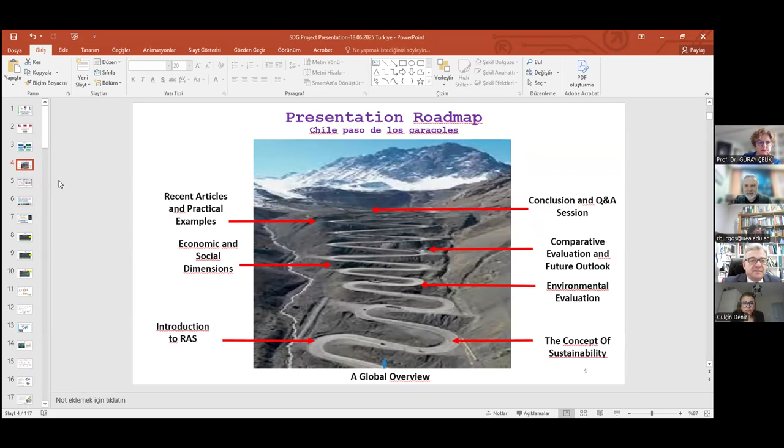This is about calories, and conflicts and income inequality I mentioned. We want to solve this problem with fisheries and aquaculture, and we would like to talk about fisheries and aquaculture.

Global fisheries and aquaculture production reached 223.2 million tons in 2022. Global per capita consumption of aquatic foods increased from 9.1 to 20.7, though these ratios change based on different countries and continents. For the first time, aquaculture surpassed capture fisheries.

We have to think about engineered facilities versus natural areas, and compare them. Because of these numbers, we have to think about more feasible engineered facilities compared to natural resources. In 2021, aquatic foods contributed at least 20% of animal protein for 3.2 billion people.

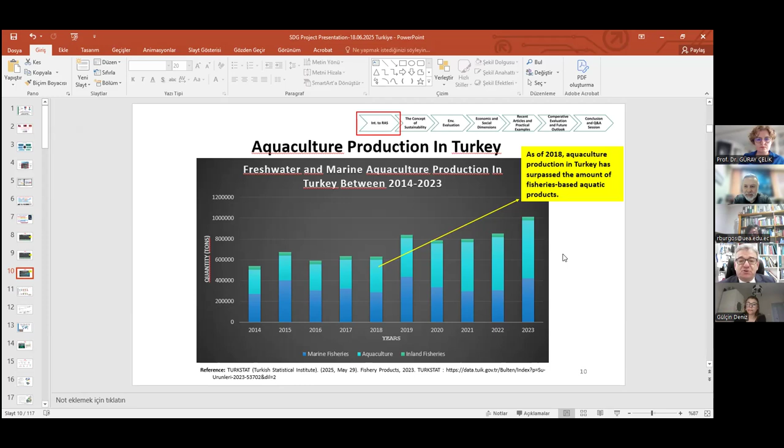Aquaculture production quantities by species in Turkey include sea bass, rainbow trout, gilt-head sea bream, in both marine and freshwater environments. In marine conditions we call it Turkish salmon, Oncorhynchus mykiss - sorry for the Latin pronunciation - we have a special species of rainbow trout.

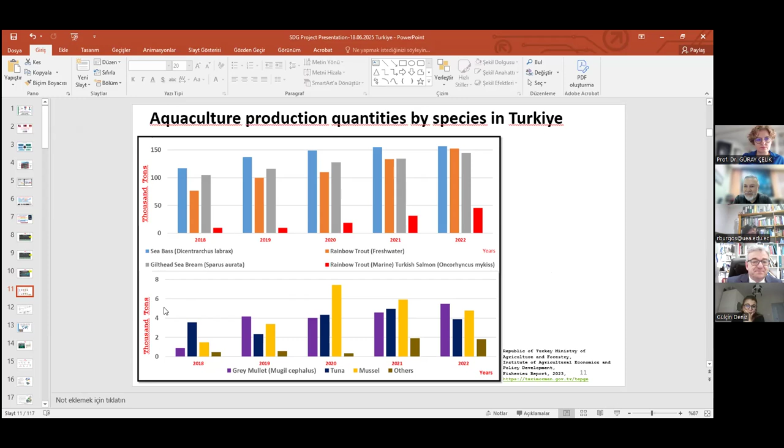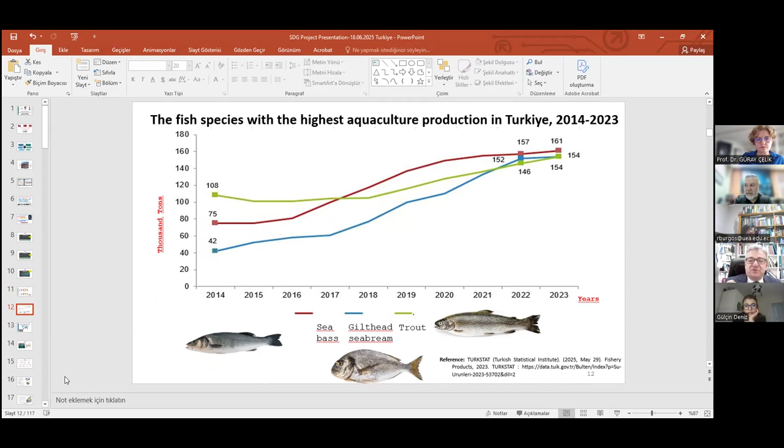The fish species with the highest aquaculture production in Turkey are sea bass, gilt-head sea bream, and trout. We generally prefer these based on kitchen behaviors or general food applications.

Introduction to recirculating aquaculture systems: like environmental engineering applications in aquaculture, recirculating systems are very important because, based on these systems, we have to think about more efficient production. On the other hand, we are talking about carbon footprint, energy consumption, and total production ratios.

The recirculating aquaculture system is a modern fish farming method in which fish are raised at high densities in closed, controlled environments, like pools or spatial areas under a roof, where we can manage specific parameters, even using artificial intelligence now. We have many different automation systems to grow fisheries and other production.

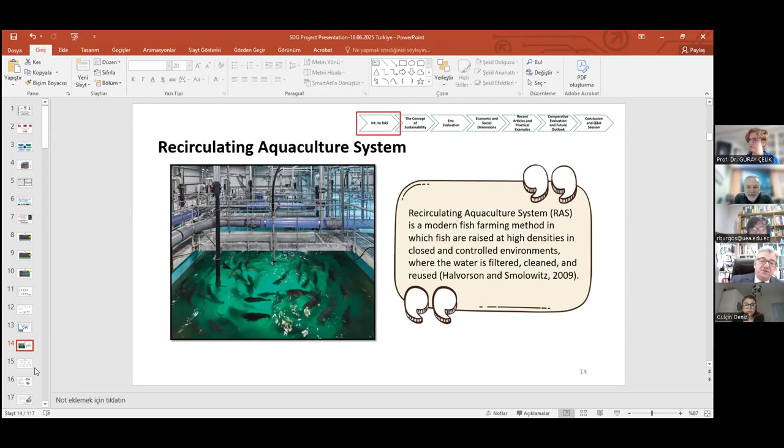Let's have a look at the history of aquaculture systems. Firstly, it's written in some literature that the Japanese - I know this - some different countries applied RAS systems, but the Japanese were more advanced than other countries.

Origins of modern RAS trace back to a German program in the mid-1970s, Denmark, and also the Netherlands in the 1980s. China pioneered the development of marine RAS systems. Now different nations, especially Norway, Chile, and other countries, even Turkey, are interested in recirculating aquaculture systems to get more fishery and other products.

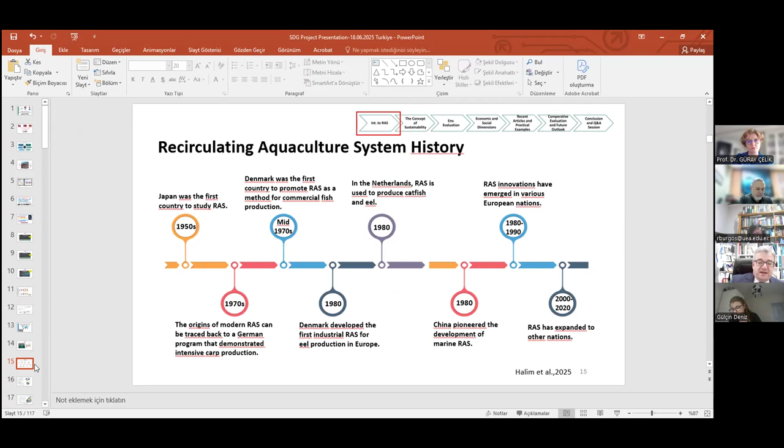Now we have some numbers on the market. The leading countries are Norway, Denmark, and the USA. The global market size for RAS systems is approximately 2 billion in 2023, with expected 10% annual growth through 2030.

Production capacity ranges between 1,000 and 5,000 tons of fish per year, and more than 10,000 tons annually with different products.

Sustainability and trends: let's have a look. Sustainable food production includes lower water use, reduced carbon footprint, and proximity to urban markets. This is the basic approach to applying RAS systems. Why do we need RAS systems? Maybe we can explain with these parameters.

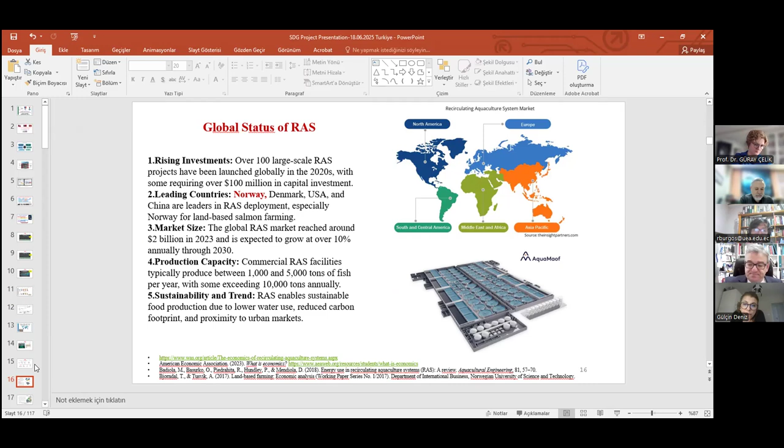Also, we have some RAS systems in Turkey. In 2021, we had 2,239 licensed aquaculture fish facilities. But the recirculating aquaculture systems have really low ratios, just 0.4%, and increasing day by day. We have a facility in Muğla, Milas, on the Aegean side, next to Greece. Besides commercial use, some universities and educational facilities, as well as research and development factories, are interested in RAS systems in Turkey. And for natural fisheries, they are interested in shrimp, especially in Bursa.

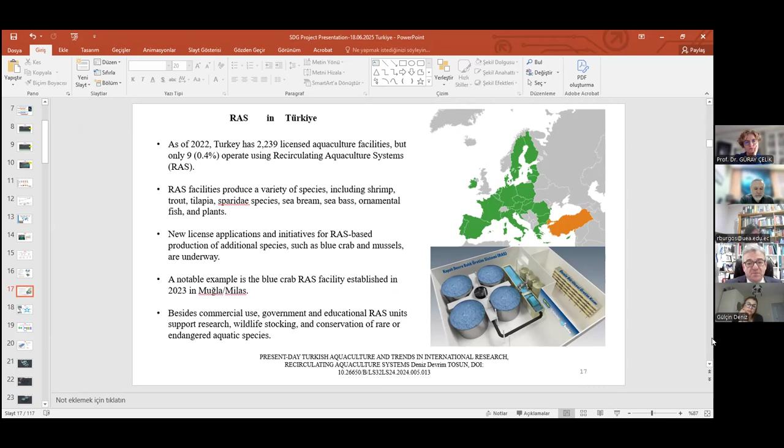I would like to repeat again why RAS systems. It's an innovative and sustainable approach; we can achieve a more effective production system using RAS systems, and we can study many different parameters within these systems. These are engineered, automated systems, and we can control many different parameters.

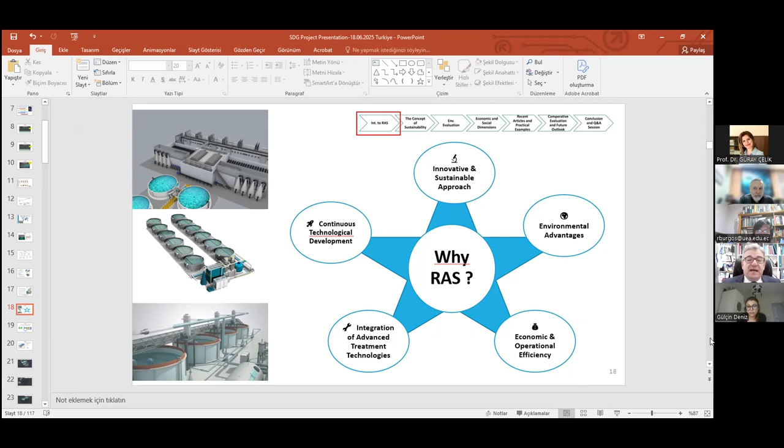Another advantage is environmental: as I said earlier, carbon footprint reduction and lower energy and water use through recirculating. In general, there's economic and operational efficiency. Another point is the integration of advanced treatment technologies, because if you want to recycle your water and use the other residues originating from the plant, you can use them for different plant growth. The last one is continuous technological development.

This is a schematic diagram of recirculating aquaculture systems: fish tank, screen filter, particle removal techniques, nitrifying biofilters, the degasser unit, UV disinfection, and we can add many different units for recycling the water based on our requirements and the requirements of the system.

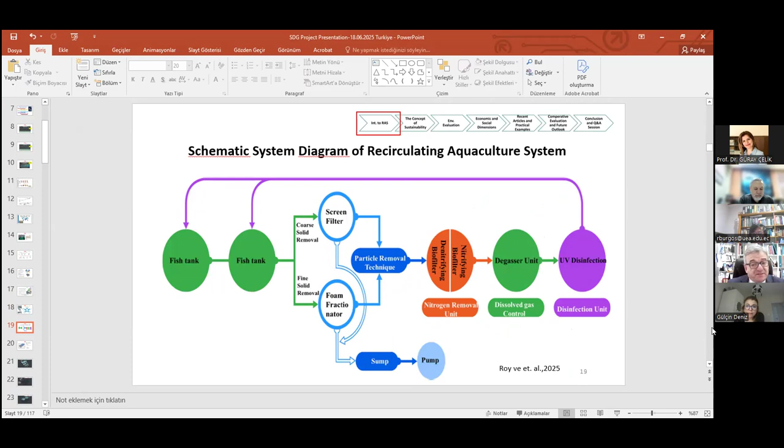The main components of RAS are the fish tank, feeding unit, mechanical filtration unit, biological filtration unit, degasser, pump, disinfection unit, aeration unit, and monitoring systems. As you can see, it's like a factory, because we want to control every type of unit in our systems, especially the water parameters: pH, temperature, alkalinity, electrical conductivity, and the residues coming from the fisheries and recycling ratios in the systems.

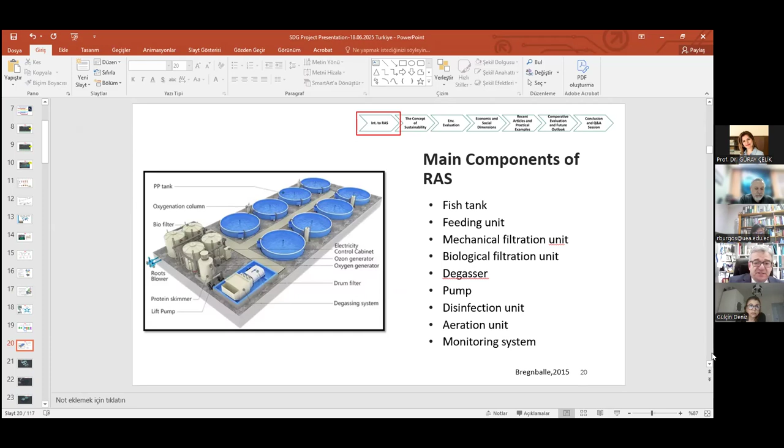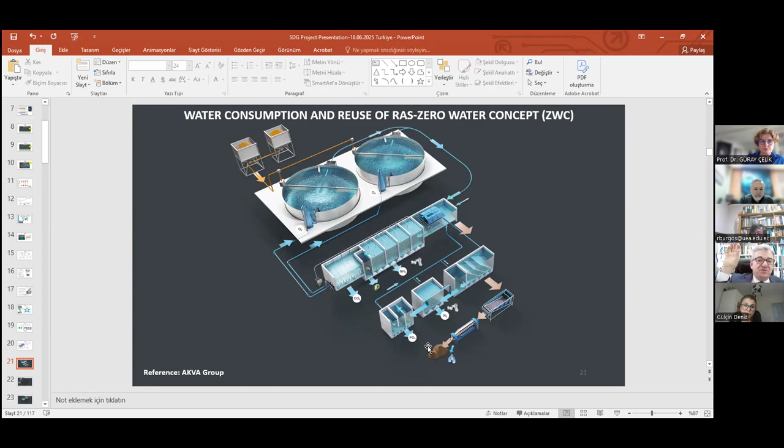Another view of RAS systems: water consumption and reuse, the zero water concept. We say the zero approach is a kind of nirvana of the systems. If you want to achieve really high level efficiency, we talk about the zero water concept. Is it possible technologically? No. But we can reduce the total water consumption in the systems, and the main idea is to approach the zero water concept.

This is the feeding system for the fisheries, and these are the fish tanks. These are controlled parameters like oxidation-reduction potential, oxygen level, pH, temperature, as I said earlier, and other different parameters like total nitrogen.

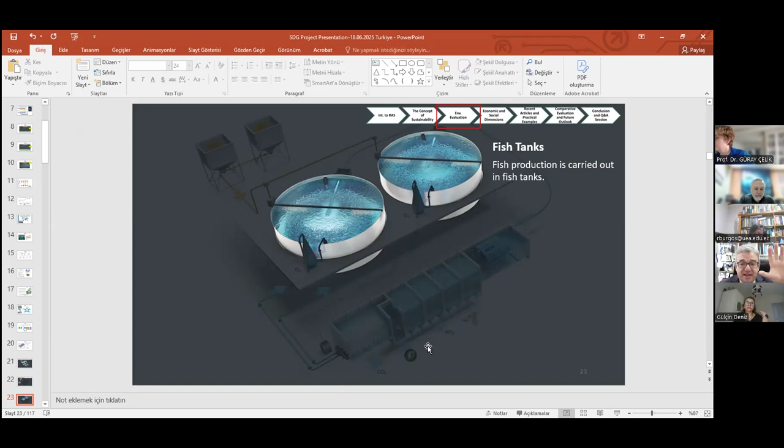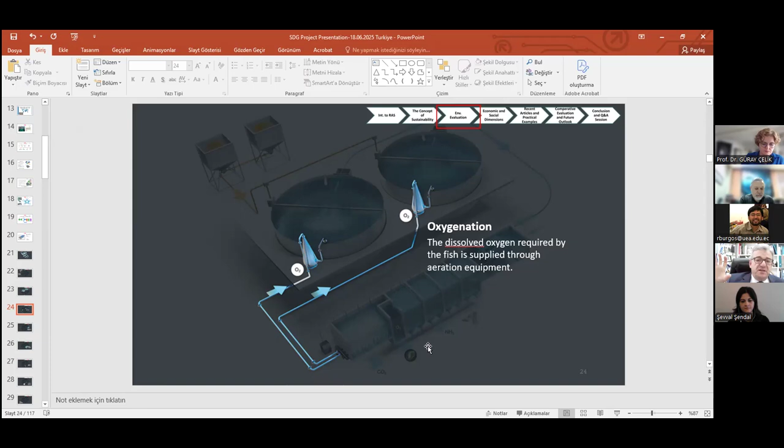Oxygenation is a very important parameter because we have to think about it. One side is energy requirements; the main energy requirement of these systems is related to oxygenation. The other parameter is how much oxygen concentration we need in our systems for the different species in the RAS systems. We use mechanical filters, biofilters, and even an ozone chamber for disinfection.

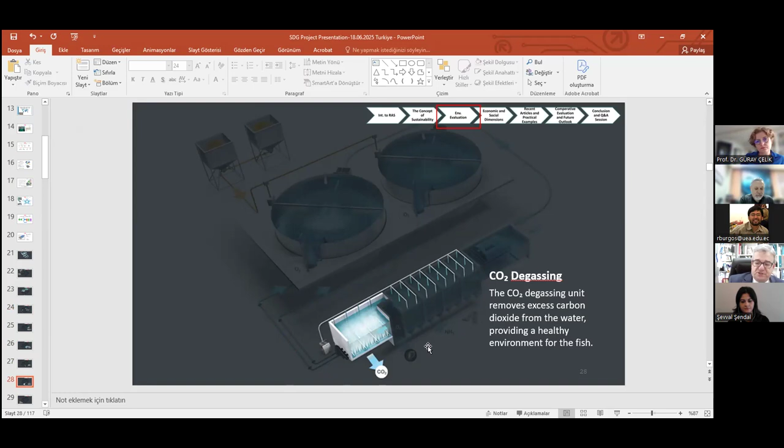And carbon dioxide degassing, because if we don't degas the carbon dioxide, we affect the growth of the fisheries. We need different types of pumps to recycle the systems, not only for water but also for the sludge.

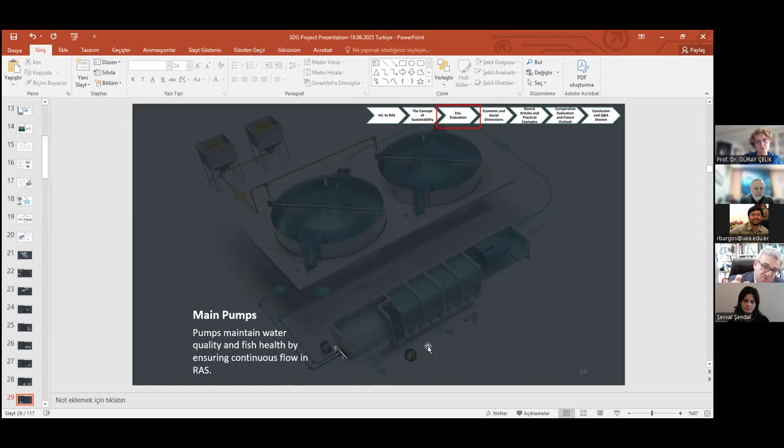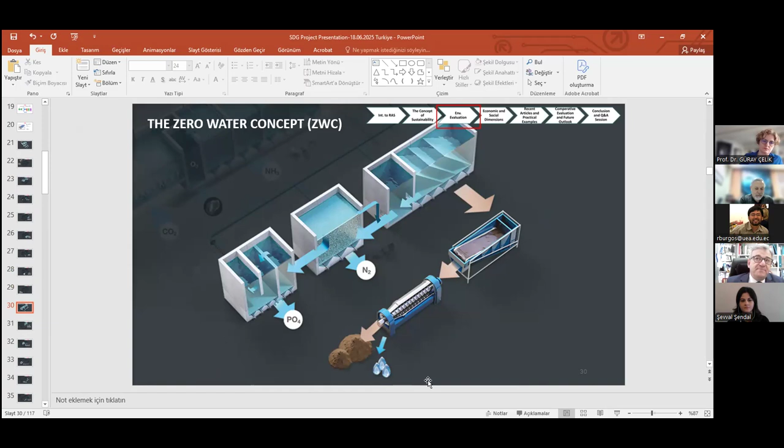This is the zero water concept we are going to discuss in our project in the coming months: to collect enough sludge, and we want to evaluate how to use the sludge as a fertilizer for plant growth, or as a protein source or main feed source.

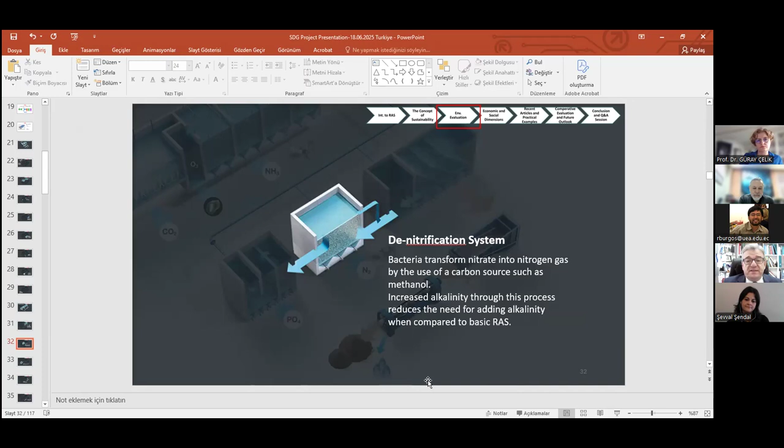Another point, we can use different environmental technologies like physical treatment, the plate separator, and denitrification systems because of the contaminants and other impurities in the recycled water.

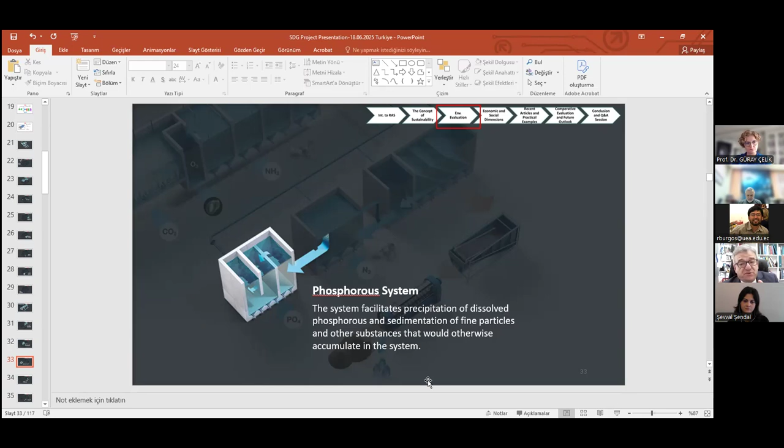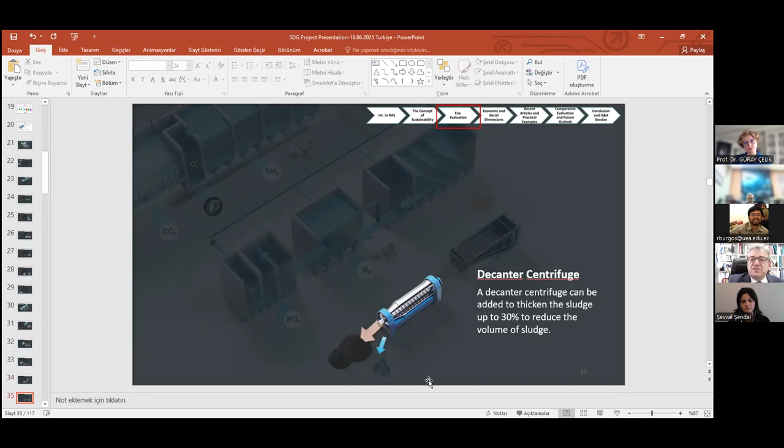Phosphorus removal is very important, because when discharged as sludge at the bottom of the pools, we have to collect the sludge. After collection, we have impurities as suspended solids or dissolved impurities in the recycled water, and we have to treat this phosphorus and nitrogen. At the end of the process, we have to dewater the sludge using a belt filter or decanters, getting 10 to 30% dry matter, and the reject water.

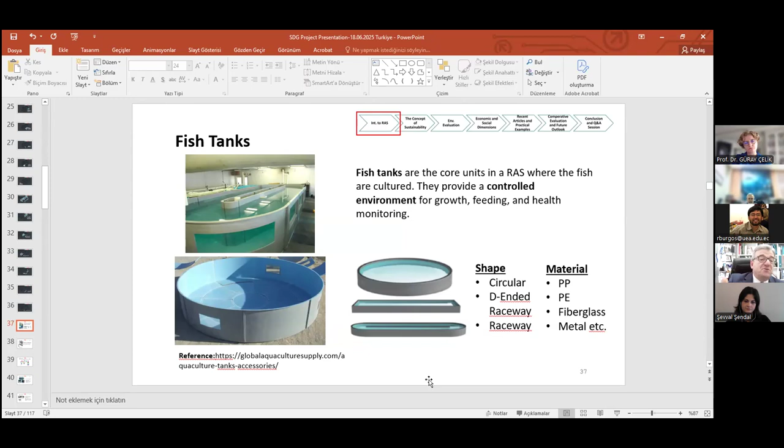Fish tanks can be made of different materials: polypropylene, polyethylene, fiberglass, or metal, chosen based on our species and investment cost. Feeding systems are also very important, because when we talk about investment cost, we have to choose the correct one for the feeding systems.

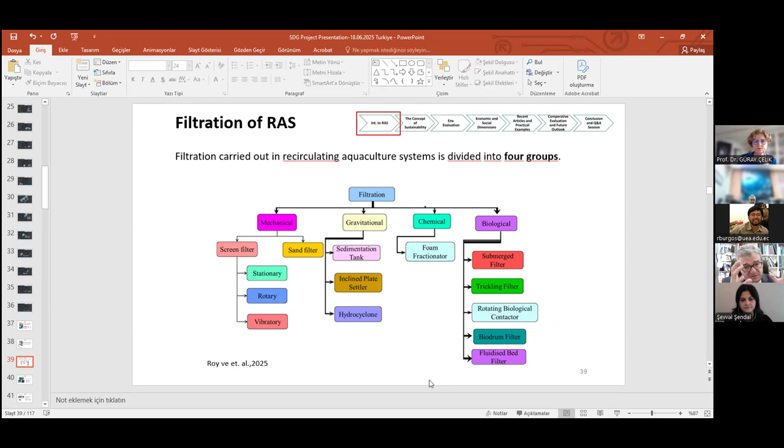We have so many different alternatives to get enough water treatment: mechanical, gravitational, chemical, and biological treatment systems we can use. By the way, we can also use hybrid systems, including not just mechanical and gravitational, but also chemical and biological.

Here is a mechanical filtration used in the RAS systems, especially drum filters, generally preferred because of their basic operation.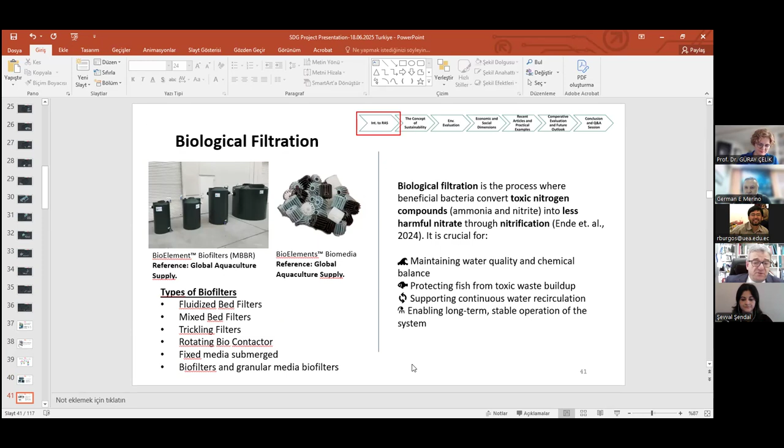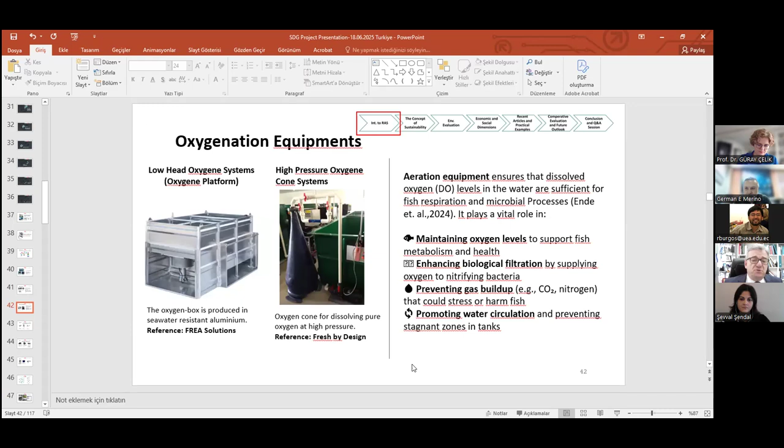And different types of oxygenation equipment. If we need just low head oxygen, oxygen platforms are okay for us. By the way, if we need more oxygen for different species, generally the cone systems are used for high capacities.

Also, we can use ozonation, UV systems, and different types of disinfection units to get enough disinfected water to recycle.

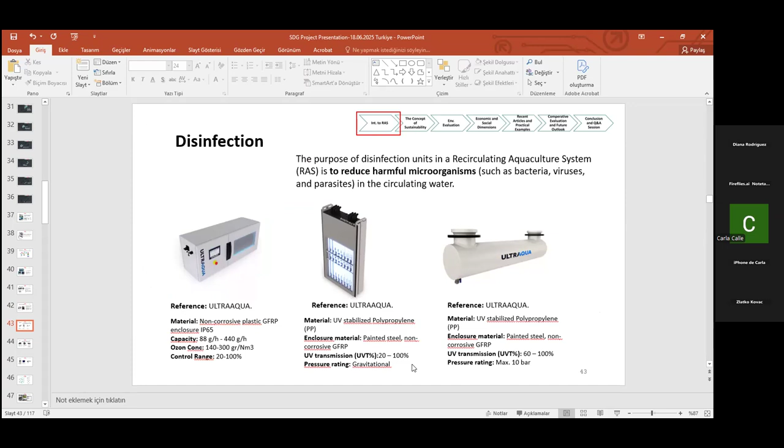And also, as I said, we need pumps: the Scorpion pumps, Enterprise pumps, and MDM Advance pumps. After the oxygenation, the second energy requirement is based on the motor and pumps.

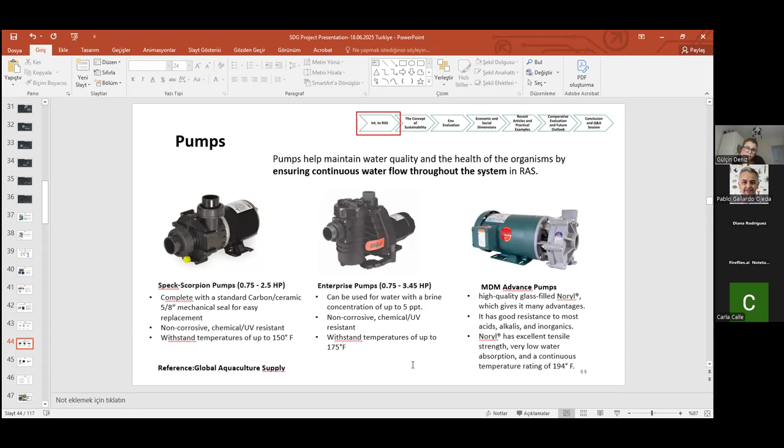Monitoring is very important because in the near future we are going to evaluate unmanned operating systems like dark factories. Maybe we can think about dark factories as dark aquaponic systems using artificial intelligence systems, and we have to monitor many different parameters.

Nowadays, we can evaluate the monitored parameters: oxygen, pH, temperature, salinity, oxidation reduction potential, and flow rate also.

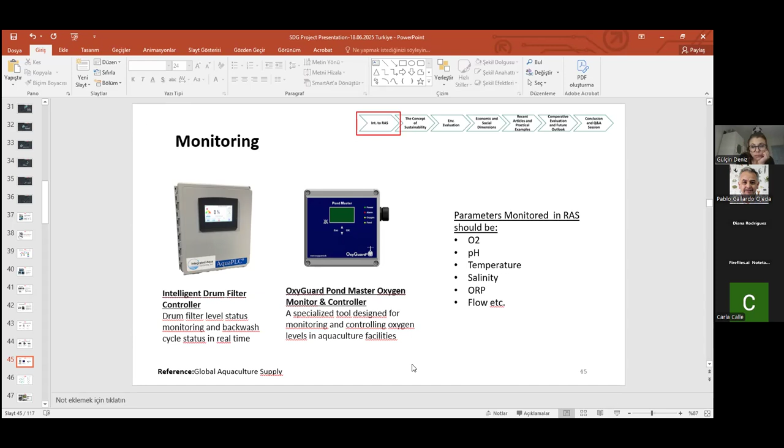Okay, we have some advantages and disadvantages with the RAS systems. I have mentioned about the advantages. By the way, we have disadvantages because of the upfront investment.

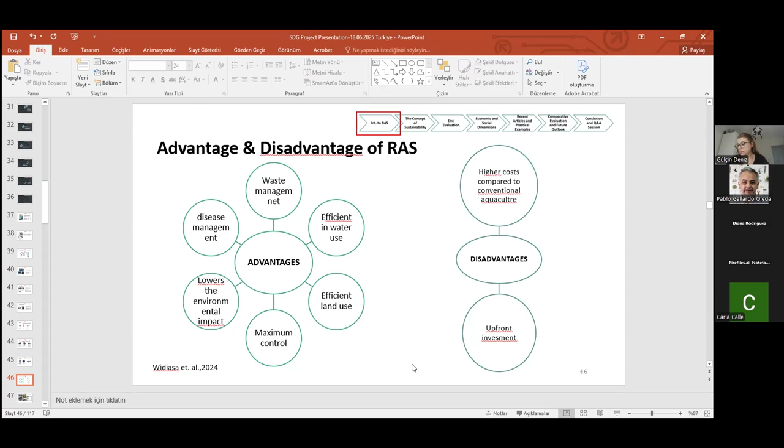And we have to compare based on the production capacity, investment, and operational cost. It's really a big and huge amount of dollars or euros we need. And some financial institutions support this kind of thing financially in sustainable development projects.

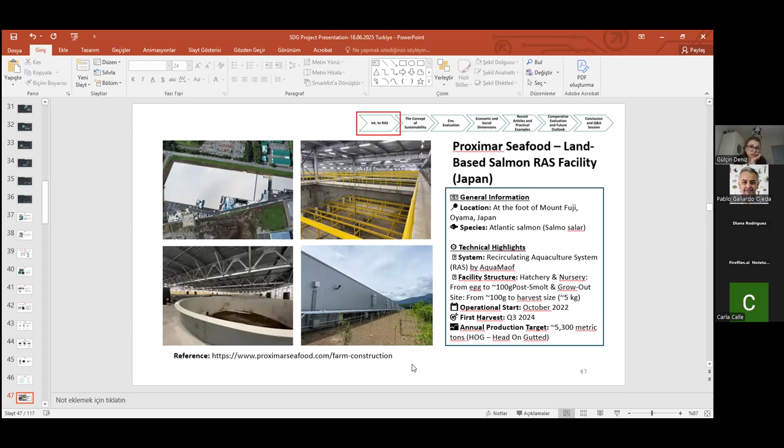Okay, there are some examples in Japan. You can see a really big one.

Okay, the concept of sustainability - Professor Güray will mention about the sustainability. Basically, by the way, I'm going to talk about it in a different way. We need sustainable development, and we have to take into account the environmental, economic, and social parts of the systems.

And in aquaponics, in aquaculture, in every kind of project, we have to think about three different parts or sides of the project: the economic side, the environmental side, and the social side, and we have to explain these to get sustainable systems.

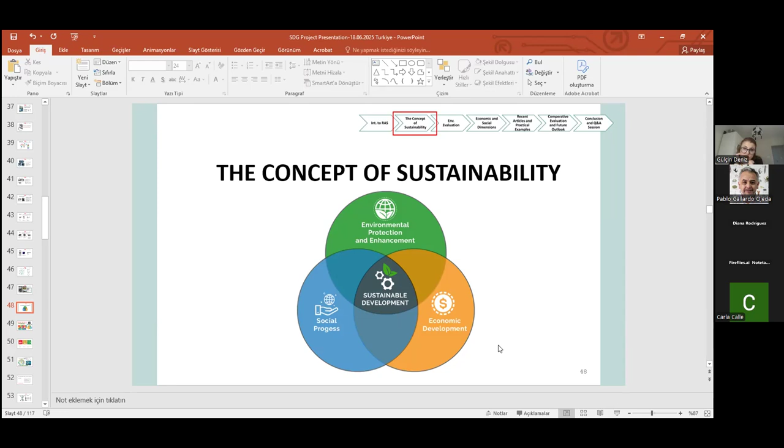Okay, these are the theory - Professor Güray will mention these systems. And why do we need RAS systems or aquaponic systems for sustainability?

For the first goal, no poverty: we have to think, or we need to think, the aquaponic systems may be basic systems, but operated in the villages, in small communities, even with really low cost investment.

Maybe we can follow or monitor fewer parameters. By the way, if we build enough capacity, like Herman is doing in the pilot systems - very important studies, thank you Herman - and if we implement this kind of system in the villages, we can think about addressing no poverty.

We can meet some requirements of the community.

And the second one is zero hunger - it's related to the first. And the third one is good health and well-being. If we produce more protein, in pilot systems or basic systems, we can get more protein, more food, and we can achieve good health and well-being in the communities.

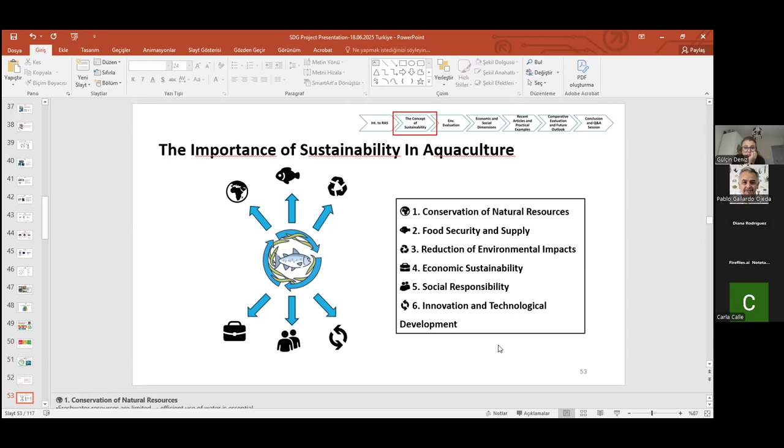And the importance of sustainability in aquaculture: conservation of natural resources, food security and supply, reduction of environmental impacts, economic sustainability, social responsibility, and innovation and technological development. These are the environmental indicators: use of space, dependence on water, use of energy, proportion of renewable energy, use of nitrogen, phosphorus, global warming potential, etc.

The economic indicators: ratio between net income and initial investment, net present value, payback period. And the social indicators, a very important part of aquaculture systems, especially for RAS systems: development of the local economy. We mentioned the local economy in sustainable development. If we want to go down the sustainability road, we have to think about supporting local economies.

For this reason, RAS systems, aquaculture systems, and aquaponic systems should be discussed and developed. And the other one is use of local workers, investment to create direct employment, safety at the workplace, pay equality, and gender inclusion.

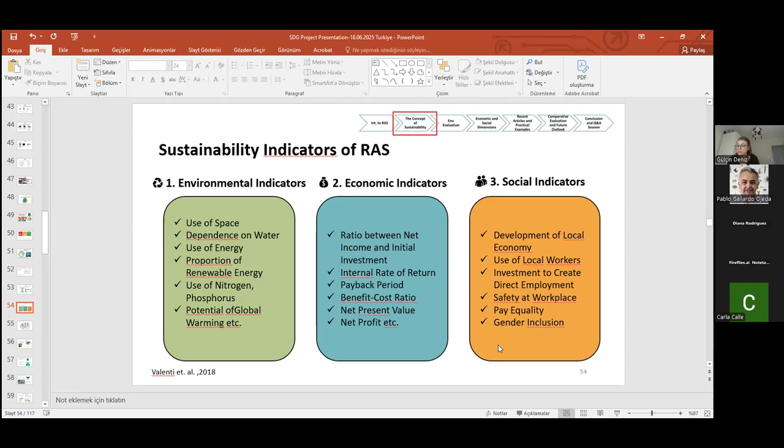Okay, if we think about biomimicry, we can think of this kind of flow sheet for RAS systems. This is the next generation approach, like in nature. Aquaculture tanks, organic waste to energy, aquaponic integration, algae reactors. I especially would like to talk about the algae reactors. In next generation RAS systems, algae reactors are part of the aquaponics, because algae is always considered a future next generation food resource.

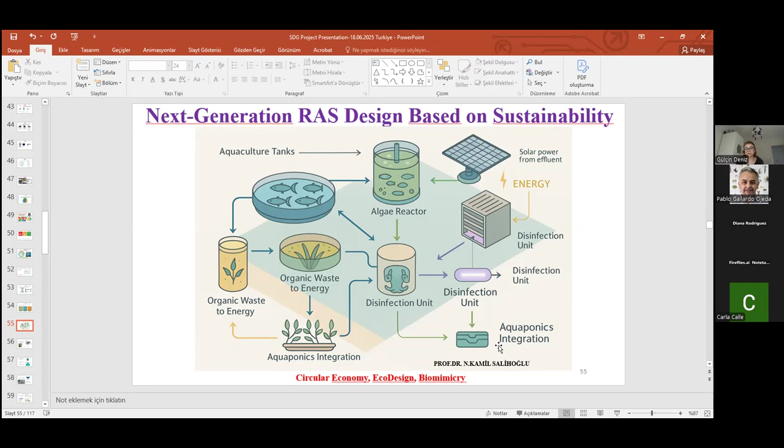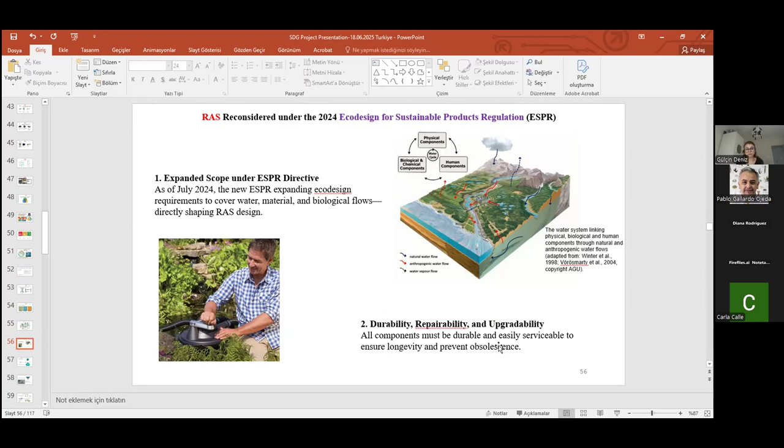The other one is solar power, especially for the disinfection units, and different kinds of disinfection units are part of next generation RAS systems. Okay, eco design. I'm going to say something about the Ecodesign for Sustainable Products Regulation and its relation to RAS. Expanded scope under the ESPR directive, and durability, repairability, and upgradability.

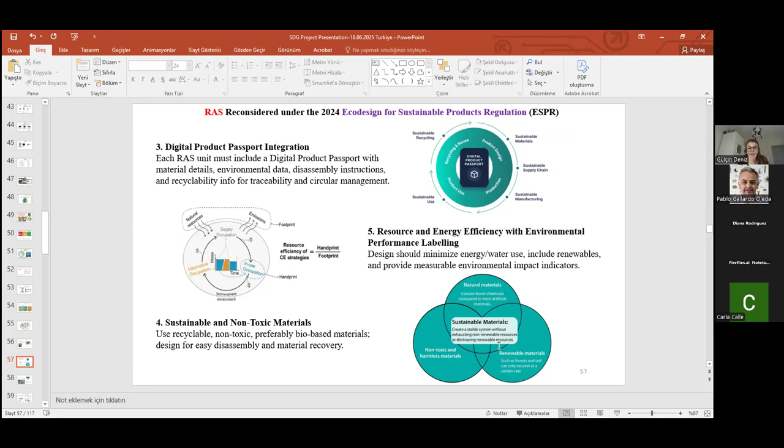Digital product passport integration for next generation RAS systems, resource and energy efficiency with environmental performance labeling we need for any kind of materials, even our fishery materials. We need sustainable and non-toxic materials to build and operate RAS systems, and also the waste as resource principle.

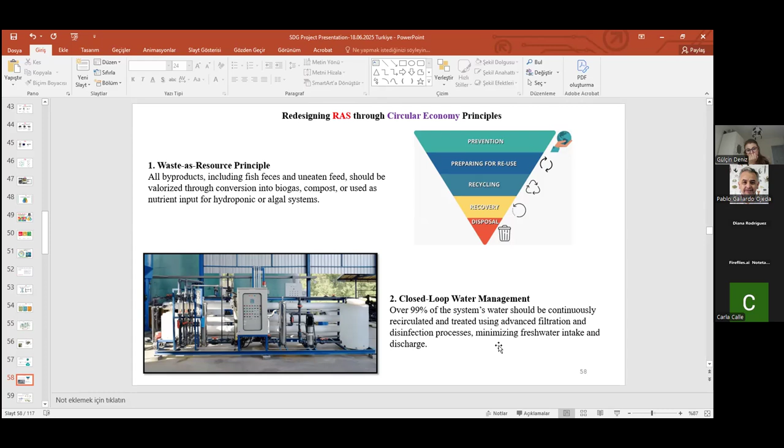If we think about the circular economy, we have to think of all kinds of waste generated from aquaponic or aquaculture systems as a source, as a fertilizer, as a protein source, as a feed source, and we have to think about the real capacity of the total sludge. And the valorization of secondary outputs; we need cross-sectoral industrial symbiosis.

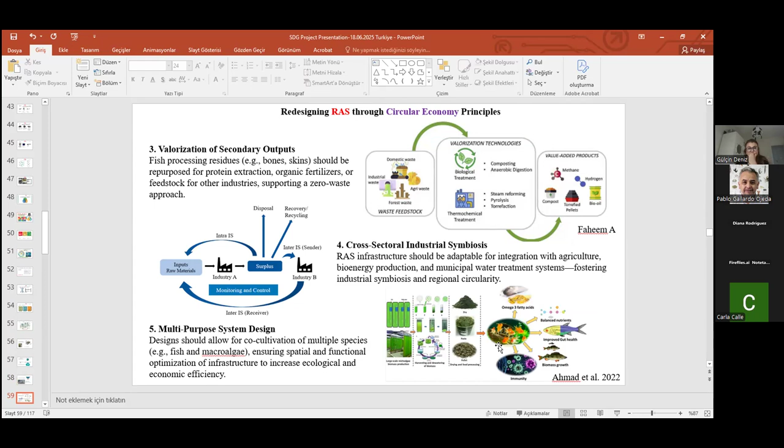As you can see, in different industries, some of the residues or waste are an important protein source for our aquaponic or aquaculture systems. We have to think about different types of waste systems in the future, and we need multi-purpose system design, like algae production and aquaponics in linked systems. Some treatment systems, like ecosystem-inspired design, should be taken into account because of the treatment cost.

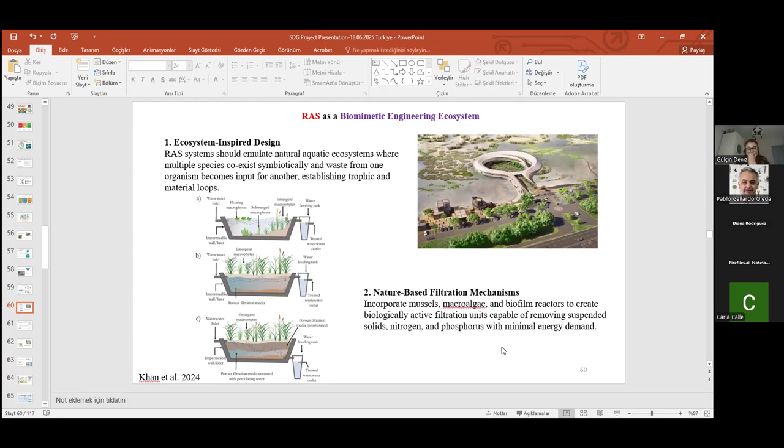Okay, and maybe we can think about preliminary treatment of the wastewater coming from aquaculture systems with more basic, low-cost ecosystem-inspired design treatments because of the operational and investment cost. Also, nature-based filtration mechanisms are very important, and some researchers are interested in these kinds of materials or systems. Another one is bio-inspired energy optimization.

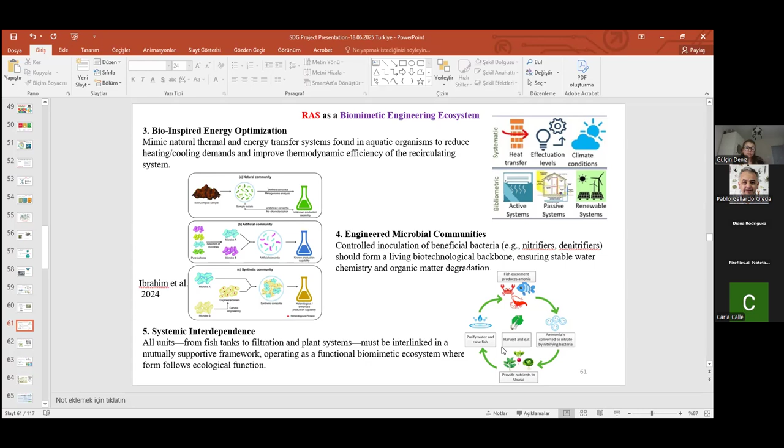If we compare bio-inspired energy optimization with solar energy and heat transfer, we have to think about decreasing the operational cost in RAS systems. And microbial communities are very important. Maybe in the near future, we are going to transform some sludge into really good protein sources using new microbial communities.

And okay, I haven't enough time, I think so. I'm almost half of the presentation. No, okay, please continue. We wait. Okay. Yeah. I'm going to finish within 10 minutes.

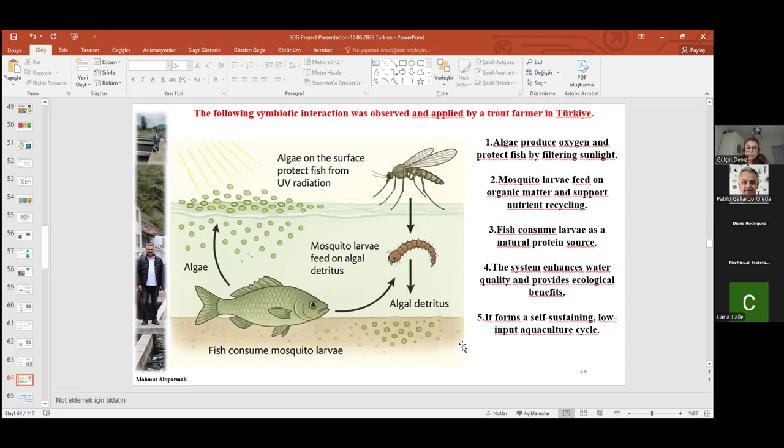Your trash is my cash, like in nature. And as you know, there is no waste in nature. In these systems, we have to think about the algal detritus and mosquito larvae as a feed for the fisheries. Okay, we have so many guidelines and standards for sustainability in aquaculture systems. This is a really recent publication, FAO guidelines for sustainable aquaculture. Okay.

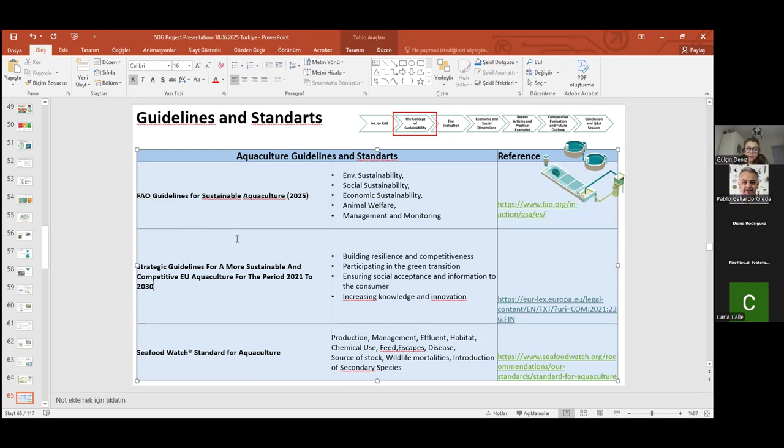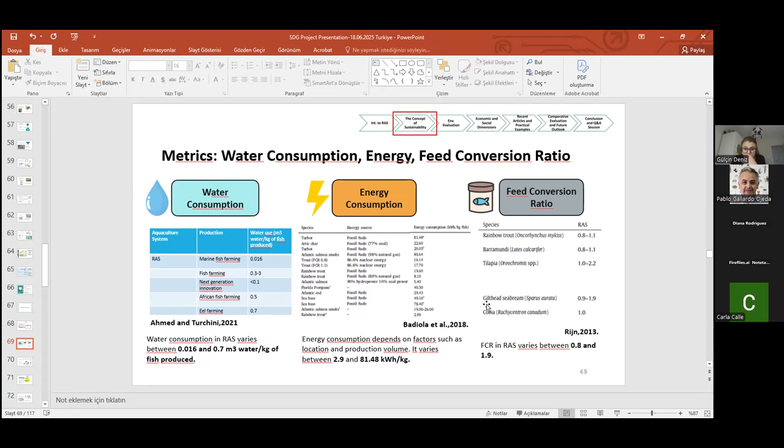In the environmental evaluation, carbon footprint and environmental footprint, we have to think about it. Greenhouse gas emission, water use, waste generation, land use, resource depletion, and pollution. And water consumption, there are some numbers on water consumption between different species, energy consumption in different systems for different species, growth of different species, the feed conversion ratios for rainbow trout, tilapia and gilt-head sea bream, as you can see. And energy optimization and renewable energy are discussed in the recent articles.

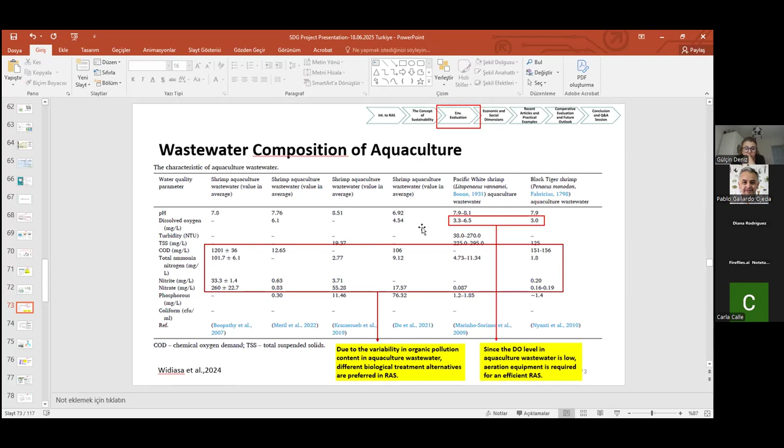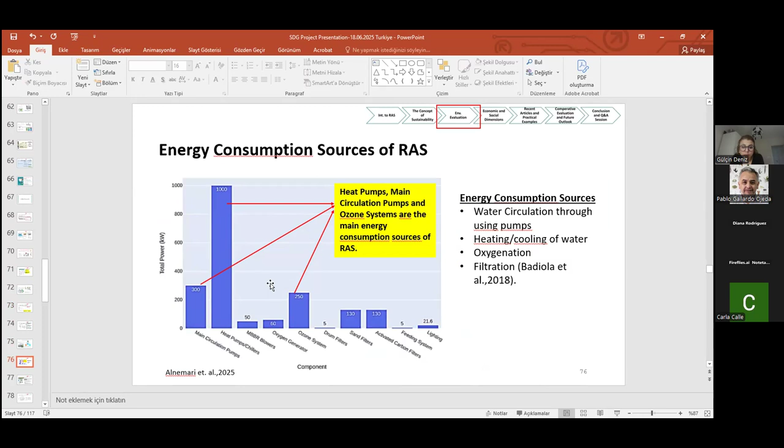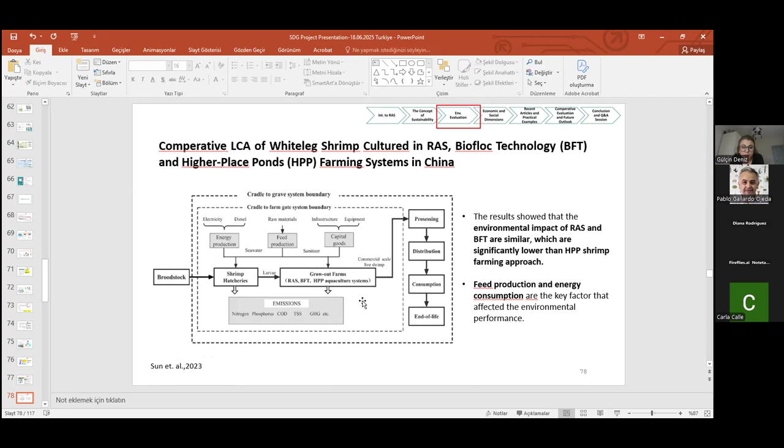Water quality parameters are very important. Wastewater composition based on different capacities and different species like shrimp and fish. And different types of disinfection units. Energy consumption: this is the heat pumps and chillers, if you want to reduce energy consumption. Sustainable hybrid systems should be taken into account. And you can see the recent articles about aquaculture and especially RAS systems. Carbon footprint of shrimp cultured in RAS. Sustainable feed sources and ingredients.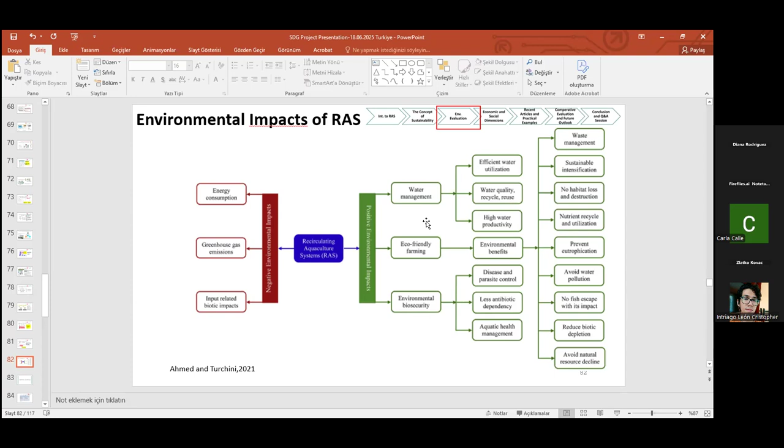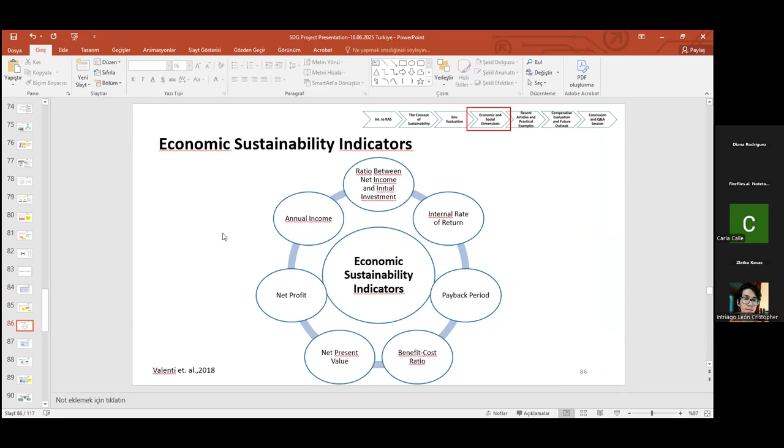We have to think about different species as a feed source. There are so many different environmental effects. Water management, eco-friendly farming, and environmental biosecurity should be taught. Another one is economic and social dimensions. Investment cost, very important. Operating costs, very important. These are the recent articles about economic sustainability. So many different standards for food, hygiene, and Aquaculture Stewardship Council standards we have. Employment, the social side of sustainability, very important.

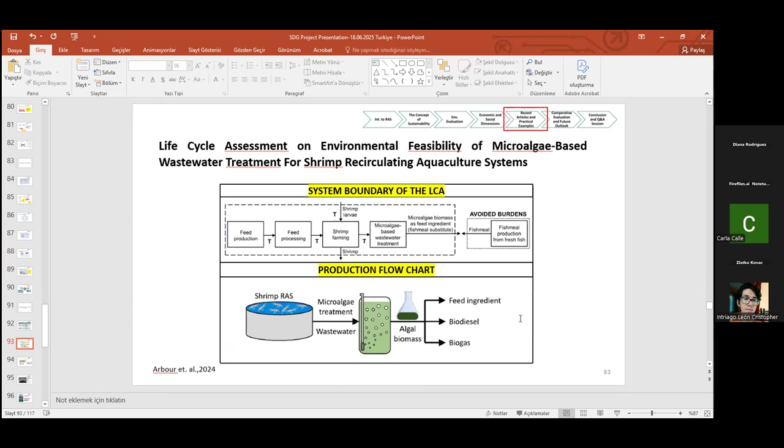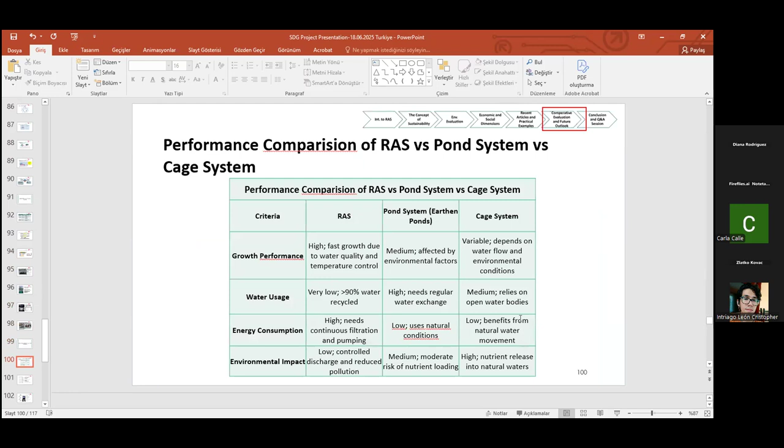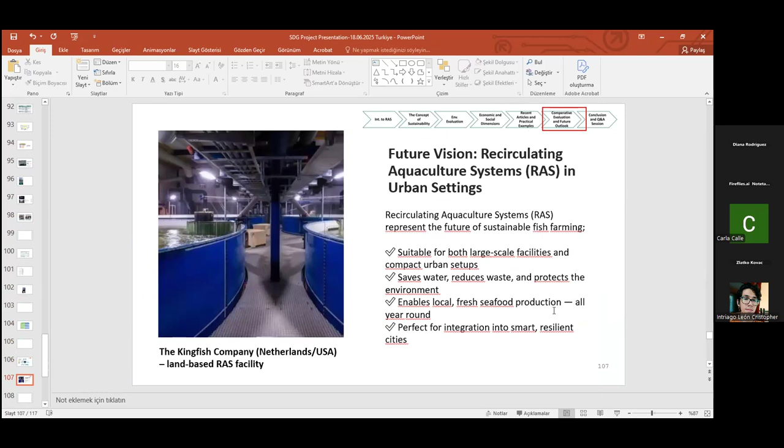Just 54% in captured fisheries and 36% in aquaculture systems. 34 million people all over the world. And some employment impacts. Okay, there are so many different recent articles. I'm going to continue. Different plants. These are the automation systems. Just a moment, please. This is the Kingfish Company in the Netherlands and USA as a land-based RAS facility. And we have some questions about RAS support systems.

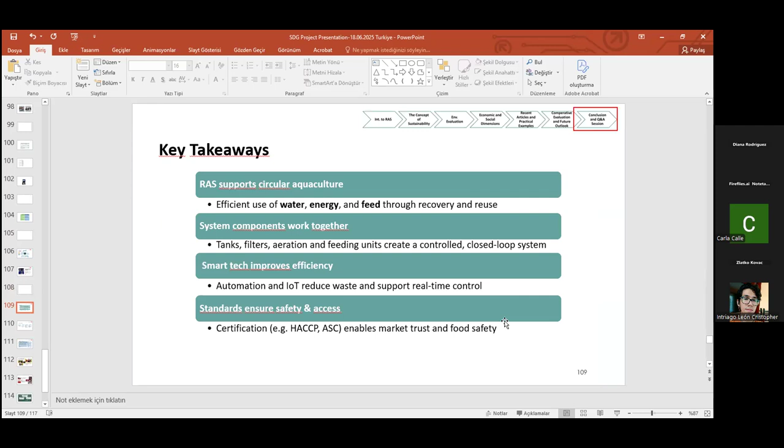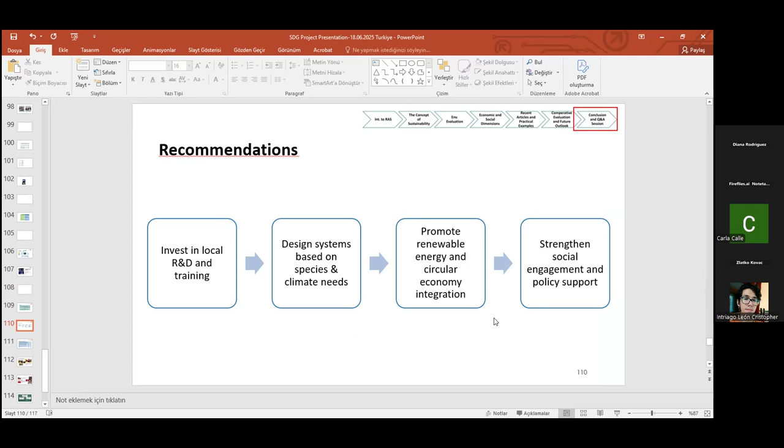Some recommendations: invest in local R&D and training, design systems based on species and climate needs in your country, promote renewable energy and circular economy integration, strengthen social engagement and policy support. If we think of this kind of investment as aquaponic or RAS systems, we have to take into account these approaches in our projects.

Thank you very much, Dr. Kamil, for your talk. I'm very impressed. So I would like to leave it open for our audience, which has been increasing a little bit, if they have any question to ask Dr. Kamil. If any of the Spanish speakers present cannot speak English, please ask your question in Spanish and I can translate. Hi, good morning. Greetings. My question is about